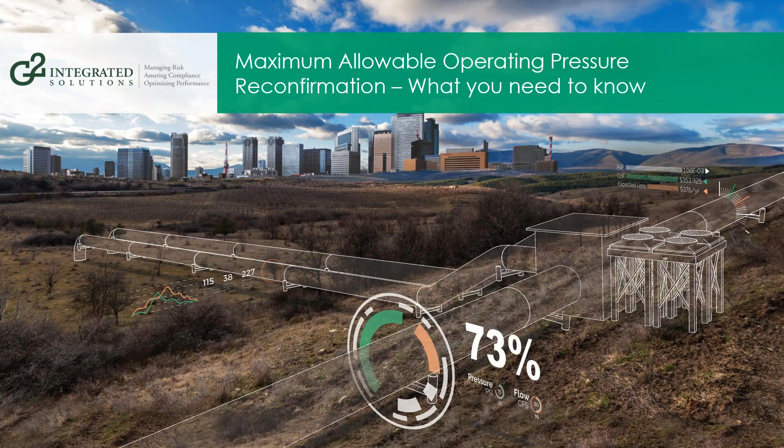The broadcast is now starting. All attendees are in listen-only mode.

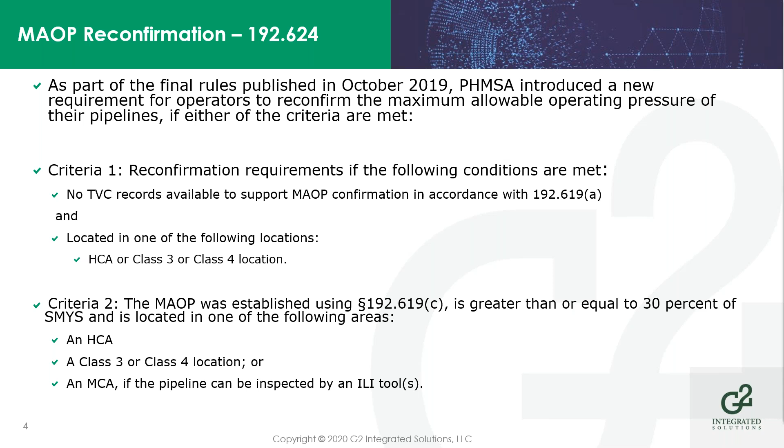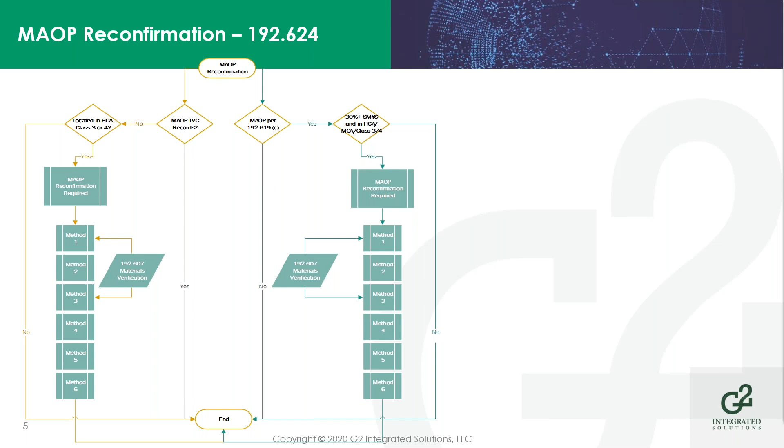All right, so the next important question to ask is, when do I have to have this done by? At a minimum, any operators who have mileage applicable to this requirement must have their procedures in place no later than July 1st, 2021.

However, if you do wish to start an MAOP reconfirmation project, you must develop and approve your procedures internally prior to the MAOP project starting, regardless of the drop-dead date. So if you're already looking to get some of this work done, we would highly recommend you get your procedures in place before you do anything else.

The other key dates here: operators who perform MAOP reconfirmation have to have 50% of their mileage done by July 3rd, 2028, and then 100% of their mileage done by July 2nd, 2035. So you have some time to get this done.

Given the ins and outs of the regulation and some of the things you'll have to do, there's some time to get it done. But the key part here is you have to get your procedures in place as soon as possible.

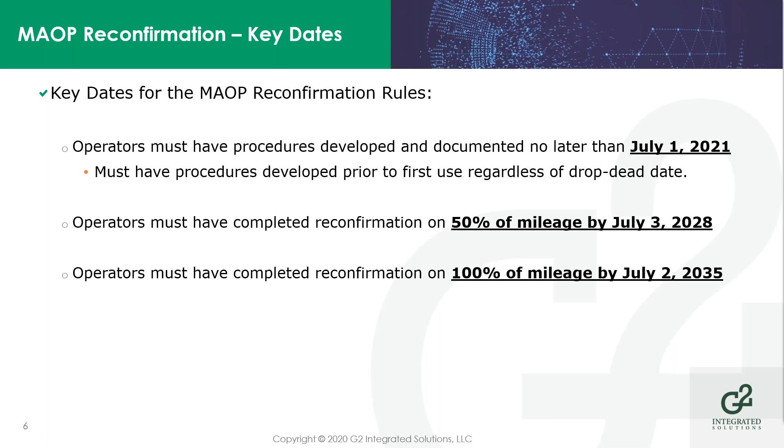And then for each of the deadlines, you can request an extension if necessary. Any request for an extension must go to PHMSA through their notification procedures. You have to include any up-to-date plans for completing all actions, the reason for the extension, the current status of your project, your proposed completion date, any outstanding remediation activities, and any temporary measures needed to mitigate impacts on safety. So anything you're doing to maximize the safety on the pipeline, you have to tell PHMSA what you're doing in order to have them consider any extension to this deadline.

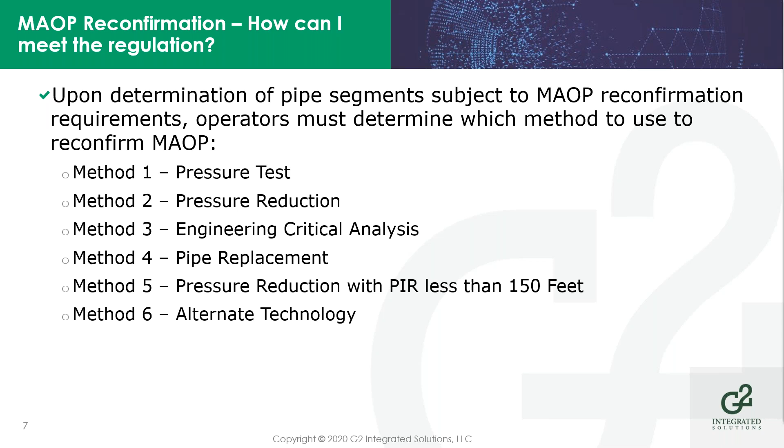All right, method 1. Method 1 is a good old-fashioned pressure test in accordance with Subpart J of Part 192. However, if you read Subpart J, you have to utilize the requirements in 192.619. You have to know what you have in the ground in order to develop a basis for your pressure test. You have to know what your pipe design is. You have to know certain material criteria and certain design aspects in order to come up with your calculated MAOP.

If you choose to use this methodology to reconfirm your MAOP, you have to have material records that are considered traceable, verifiable, and complete. If you don't have traceable, verifiable, and complete records, then 192.624 will point you to develop procedures in accordance with 192.607, which is your materials verification procedures. This basically ensures that operators of any grandfathered lines, or lines they purchase where they don't have records, can determine what they have in the ground to figure out what their MAOP calculations are. We'll talk about 192.607 a little bit later in the presentation.

But we'll focus on just the pressure test for right now. One of the other key points of method 1 when you're doing a pressure test is that if you have to validate your materials, this regulation requires you to test any materials cut out from test sites. If you're installing a header manifold or other equipment to perform a pressure test, you're required to test those materials both destructively and non-destructively in order to obtain any missing material records that you may have.

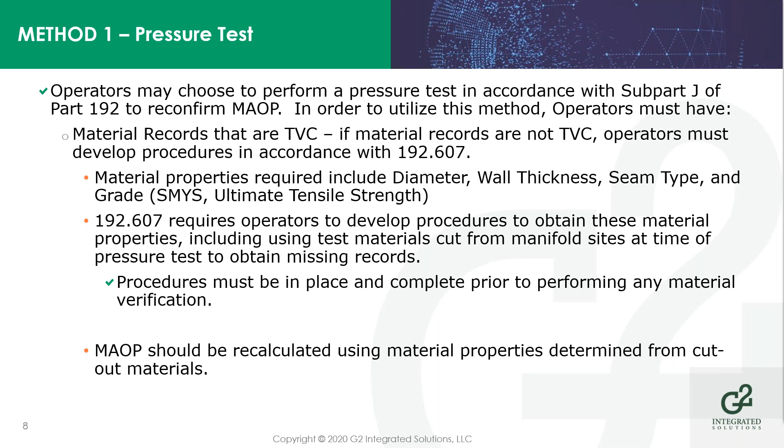Method 2 involves a pressure reduction. Operators can choose to take a pressure reduction in lieu of other options. This allows operators to avoid performing a pressure test by using this method. So basically you have to reduce your pressure and limit your MAOP to no greater than the highest actual operating pressure sustained by the pipeline during the 5 years preceding the enactment of this rule, which was October 1, 2019, divided by the greater of 1.25 or the class location factor. So if you have a higher class location factor, you have to use the higher safety factor.

The determination of your highest actual sustained pressure has to be the highest actual pressure for an 8-hour period. That 8-hour period does not need to be continuous. It can be made up of a variety of different time periods over the course of a 30-day period that account for a total of 8 hours at or above a certain pressure. So this method allows an operator to basically say, hey, we're good at operating at a lower pressure. We're going to drop our pressure down in accordance with this requirement, and then we don't need to do anything else.

If you changed your pipeline segment based on your class location and you don't have TVC records—TVC records being diameter, wall thickness, seam type—then you have to reduce the pipeline segment MAOP as well.

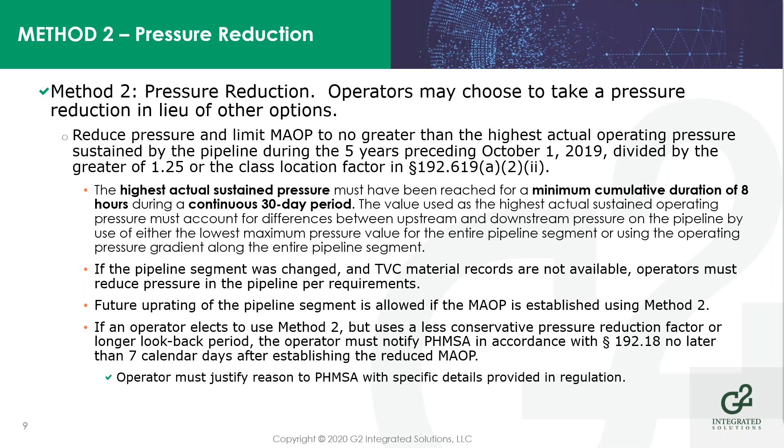Okay, method 3. Method 3 is an engineering critical assessment. An engineering critical assessment is basically a full technical assessment of the pipeline's MAOP. It's a procedure which determines the MAOP of the pipeline segment based on failure pressure, flaws, or defects. ECAs utilize material properties, operating history, ILI runs, other data to determine the predicted failure pressure of any particular flaw or defect in the pipeline.

Similar to method 1, an ECA does require a full materials verification. So if you don't have materials records that are TVC - traceable, verifiable, and complete - you're going to have to complete a materials verification in conjunction with this engineering critical assessment.

So the ECA does analyze and determine cracks or crack-like defects, metal loss defects, as well as analysis of interaction of defects to determine what the most limiting predicted failure pressure would be, which then allows you to develop your MAOP based on that lowest predicted failure pressure and the safety factor for either 1.25 or the class location factor.

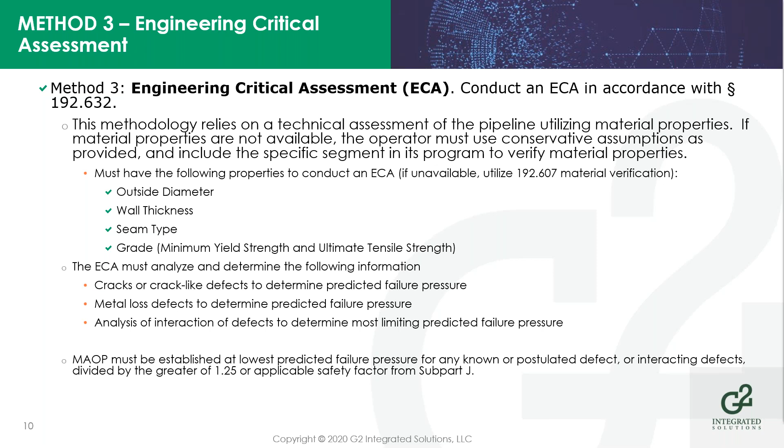Moving on, you're going to then determine the defects and the type and size. Once you've determined the type and size of the defects, you're going to perform your analysis suitable for that threat type. So if you've got metal loss, you're going to perform an analysis method suitable for metal loss.

Once you've performed your analysis method, you're going to calculate your failure pressure and your MAOP for whatever the lowest predicted failure pressure for any known or postulated defects that remain in the pipe. So if you've performed remediation on the pipe and you know you have defects that are still remaining based on whatever your IMP plan calls out, you then calculate what your failure pressure is based on what's remaining in the pipe. If you have cracks or crack-like defects, you need to calculate remaining life as well, which will then lead you into reconfirming what your MAOP is.

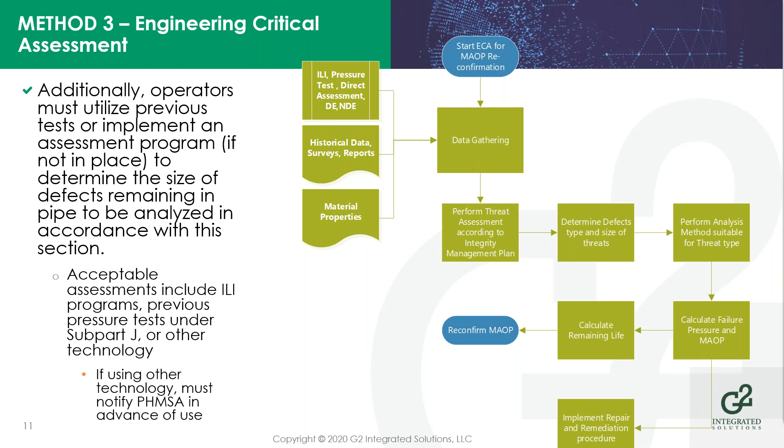Again, if you decide you want to use other technology for an assessment method other than what's provided, you have to notify PHMSA in accordance with 192.18.

So method 4. Method 4 is the simplest, albeit probably one of the more expensive options. In essence, it allows an operator to simply replace the pipeline segment and perform requisite pressure testing and material verification associated with any new construction project.

If you're already planning to replace pipe, this is probably a pretty good option to reconfirm a segment, because you're going to gather all the data as part of that pipe replacement. You're going to create new material records, you're going to perform a pressure test, so you're basically going to create all the missing records, albeit for a new section of pipe.

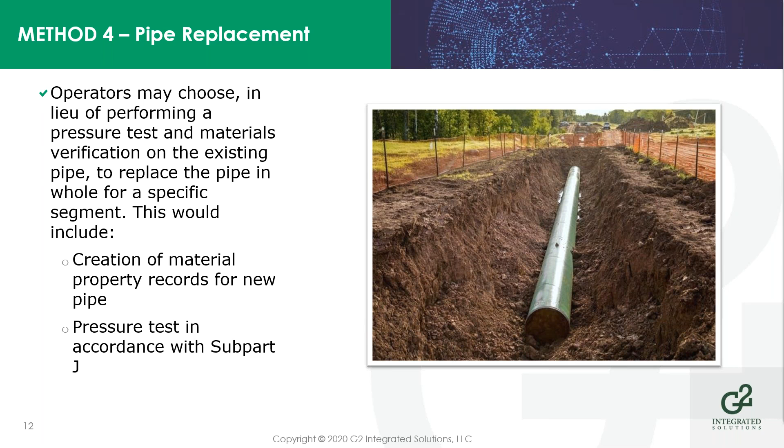All right, method 5. Method 5 is similar to method 2, and it involves a pressure reduction. However, this is for pipeline segments that are operating at a lower pressure, so basically a potential impact radius of less than or equal to 150 feet. The difference between method 2 and method 5: method 2 utilizes a safety factor at a minimum of 1.25 or the class location factor, while this method utilizes a factor of 1.1.

Which is reflective of the lower pressures involved as part of these particular pipeline segments. Other requirements are very similar or the same, including the determination of how you come up with your highest sustained pressure, 8 hours over a 30-day period, and the ability to uprate the pipeline segment in the future.

One difference here with method 5 is there is a requirement to increase patrolling. Class 1 and 2 locations will increase from 2 times per calendar year to 4 times per calendar year. Class 3 and 4 locations will go from 4 times per calendar year to 6 times per calendar year. Any regular methods of patrolling are considered appropriate. So again, it's similar to method 2, but it's changed for those lower pressure, lower stress lines.

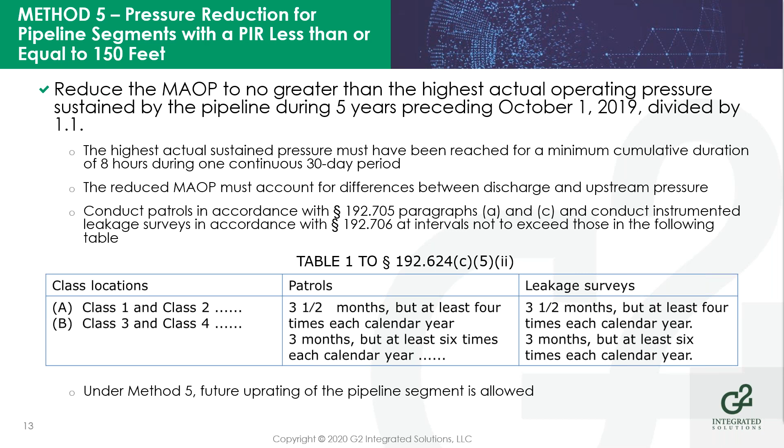And then finally, method 6. Method 6 is PHMSA's all-encompassing alternative technology. If you have another methodology that you can use to safely determine the MAOP, you can petition PHMSA to use this method. If you do petition PHMSA, you must clearly explain what you're planning on doing, what technology you plan to use for tests, examinations, and assessments, how you plan to establish material properties, any analytical techniques you may use with analysis from utilizing prior data to ensure consistency in the results.

As well as any other processes you use to ensure consistency with any corresponding test pressures, hydrostatic tests that you've performed on the line. Procedures and processes, again, you have to explain what procedures and processes you're using to actually conduct this work, conduct examinations, any assessments, how you're analyzing defects, flaws, and how you plan to remediate anything. You must also include any pipeline segment data, including design, maintenance, operating history, and characterization of flaws or anomalies. If you do use method 6, in accordance with PHMSA requirements, you must notify them no less than 90 days in advance of using this technology.

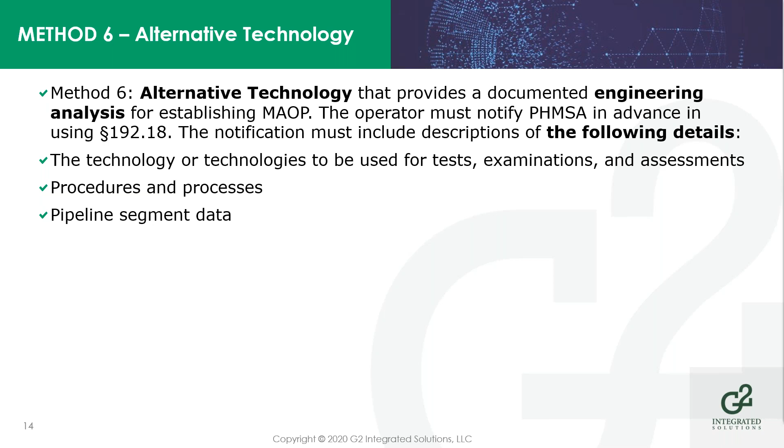And finally, records. Any records developed during an MAOP reconfirmation project should be retained for the life of the pipeline. Essentially, this makes sense. A lot of these lines that are going to be affected by this regulation don't have these records. So we're going to develop these records, maintain these records in the event that the pipeline gets sold or transferred to a different operator. That way that information is available.

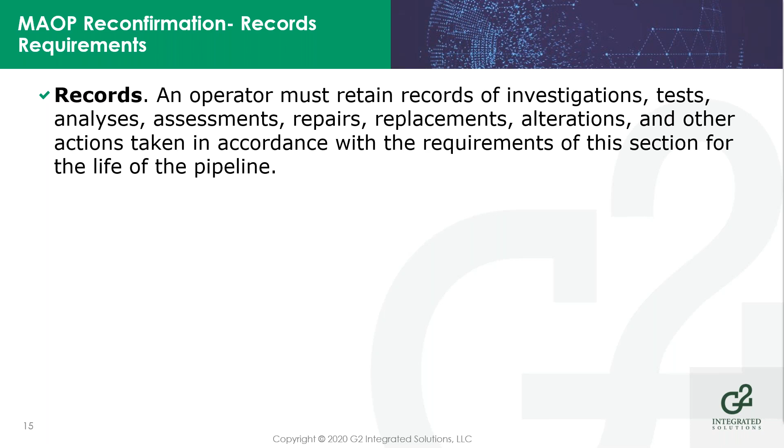All right, so we've talked a lot about MAOP verification. Now we're going to talk a little bit about the materials verification requirements in 192.607. As I talked about previously, 192.607 is a requirement for operators to develop the procedures to verify materials for pipeline segments where they don't have traceable, verifiable, and complete material records. Again, this is notable as a requirement of both Method 1 and Method 3 for MAOP verification.

Once you realize that you have to go ahead and perform this type of work, you have to develop procedures to gather this data from your pipeline segments. Now, this applies to both above and below ground pipeline segments, so it's got to be applicable to both digging and not digging. Material records specified by the rule includes diameter, wall thickness, seam type, pipe grade. For valves and flanges, you have to have a pressure rating.

Additionally, this section requires any toughness values that you gather as part of this material verification process in order to either conduct an ECA or determine your predicted failure pressure. You have to retain those records for the life of the pipeline. So key points here, you have to develop the procedures and show how you're going to gather this data. They should cover both destructive and non-destructive testing, direct examinations, assessments for when your pipe is exposed, particularly if it's all below grade.

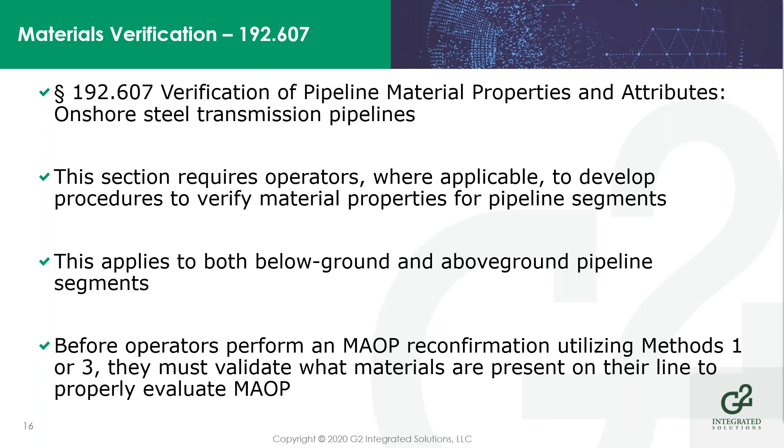So 192.607, PHMSA realized that the intent to go and just dig up pipe to verify materials was going to be fairly expensive and time-consuming for operators. So testing is not expected to be performed, or digging is not supposed to be performed, solely for the purpose of material verification. But material verification should be worked into an operator's dig program to provide for testing during opportunistic times. So things like if you're doing a direct examination on an anomaly, if you're performing a repair, a remediation, you're doing maintenance, or you have an excavation associated with a replacement or relocation.

Operators should ensure that if they're looking for material verification, they work the verification project into any existing dig program opportunities.

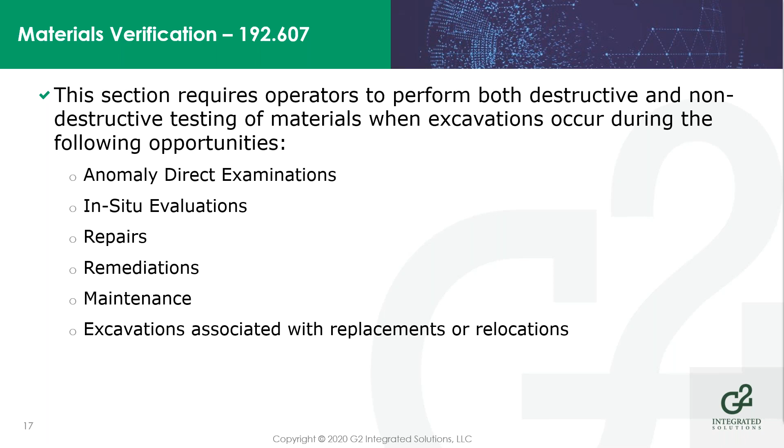You should also note that as part of opportunistic excavations, materials verification may result in the hole being open longer than expected. This is a logistical issue. You want to make sure you have crews ready to perform whatever testing you need once a line is exposed, so it's not exposed for an extended period, and that everybody's working together to ensure the data gathered during these excavations is gathered correctly, so you have good quality data and can ensure you have TVC records after the work is complete.

Some other requirements in 192.607 are specific to non-destructive testing methods. If you build out a procedure, you must use methods, tools, procedures, and techniques that have been validated by a subject matter expert. PHMSA expects that a subject matter expert is someone with formal or on-the-job technical training in the technical or operational area being analyzed, evaluated, or assessed. So someone with formal knowledge, training, and experience in that area should be validating these procedures

that are going to be used. You must also conservatively account for measurement inaccuracy and uncertainty. You should manage that in the process if you know you have tools that either have a margin of error, or some other means of introducing inaccuracy, or if you don't know if it's 100% accurate, you have to adjust for that, sliding more on the conservative side.

And finally, this kind of goes without saying, but it bears repeating: always make sure you're using test equipment that's been properly calibrated. Keep your equipment calibration and calibration certificates, because that's going to be checked during an audit.

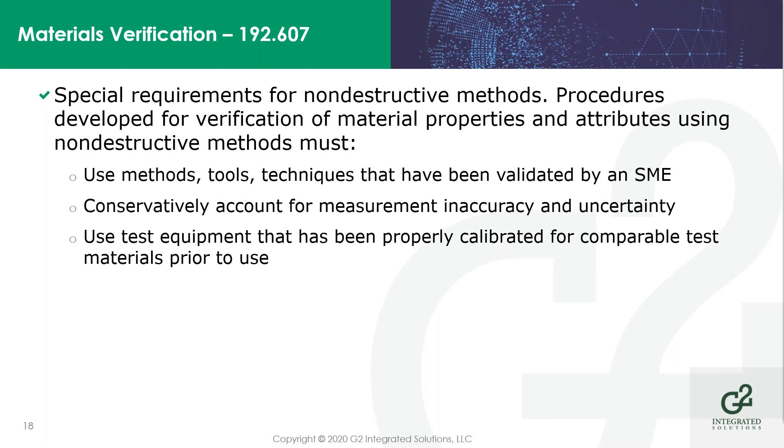All right, so sampling. Any operators who may have large segments of pipe without material data, PHMSA has included an option to develop a sampling program. Operators can group like segments of pipe together based on certain attributes, including wall thickness, grade, manufacturing process, pipe manufacturing dates, and construction dates. When determining sample populations, you really need to be careful about the dates you're using to bound these populations together.

Dates between construction and manufacturing should never exceed 2 years. It's not a sliding scale, it's a hard stop after 2 years. Just as an example, if you have pipe manufactured at the same time, store it on the rack, and install it together, say 3 years down the road, you can include that pipe in the same population segment. However, if you manufacture pipe at the same time, install half of it, and then install the second half 2.5 years later, those are two separate populations of pipe, because they've had different environments that they've been in.

Also, one of our recommendations, though not explicitly called out in the regulation, is that you keep your sample populations to the same diameter as well as the same pipeline system. This allows for easier record keeping and delineation of specific pipeline segments, and it'll assist with the determination of MAOP.

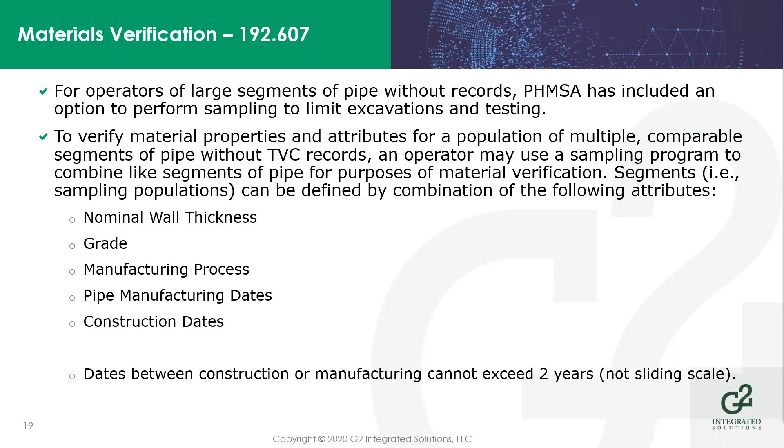For operators with larger pipeline segments, once you define those segments, you have to figure out how many excavations need to happen. Basically, if you have a large population, PHMSA requires 1 per mile rounded to the nearest whole number, or up to 150 excavations if you have over 150 miles of line. For each defined sample population, you need the number of excavations with accompanying material verification to establish statistical assurance for that sample population. If you haven't exceeded that number of excavations, any other excavations on that pipeline segment are useful for sample population protocols, so you can use other excavations to help support that sampling.

You should ensure that, again, it's 150 excavations over 150 miles. Usually what we've recommended to operators performing this type of work is that you should strive to have at least 3/4 of a mile between excavations. This allows for a greater distance to determine if you have consistency with the sampling project, and that's a key thing: establishing consistent results. If you don't have consistent results, you have to expand your sampling program. The key here is that you have to achieve some sort of confidence level.

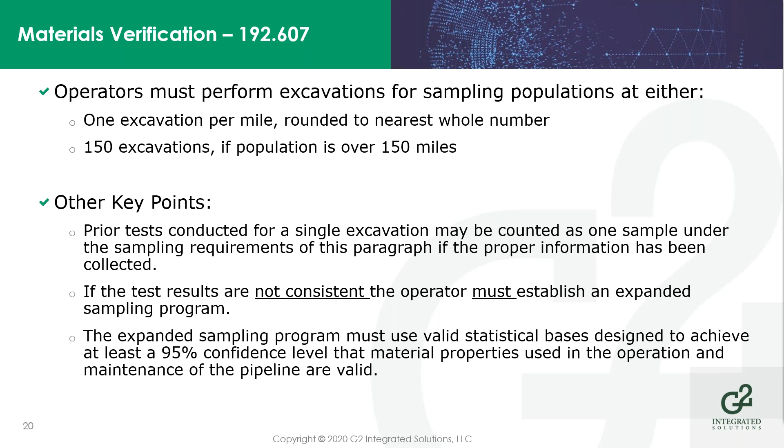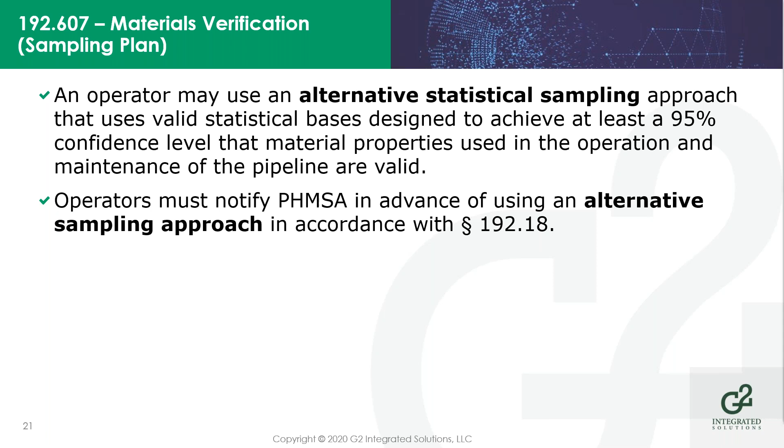And again, PHMSA always provides the alternative approach. If you have a better way of doing things, a better methodology, you can request approval from PHMSA to use that approach. You must, again, achieve at least a 95% confidence level using that standard statistical methodology. Same notification requirements apply for this as well. You have to notify PHMSA at least 90 days prior to implementation of this type of work.

All right, so finally, components. Operators still have to develop similar material verification procedures to establish and document ANSI ratings, with the exception of the places listed here in Part 1 - compressor stations, meter stations, reg stations, river headers, mainline valve assemblies. You have to verify material properties for non-line pipe components if it's greater than 2 inches in OD, if it's greater than X42, 42,000 PSI, and anything that you cannot isolate, you have to go ahead and verify the material properties for those non-line pipe components.

And the same thing applies - you have to make sure you have procedures in place prior to performing any material verification on non-line pipe components.

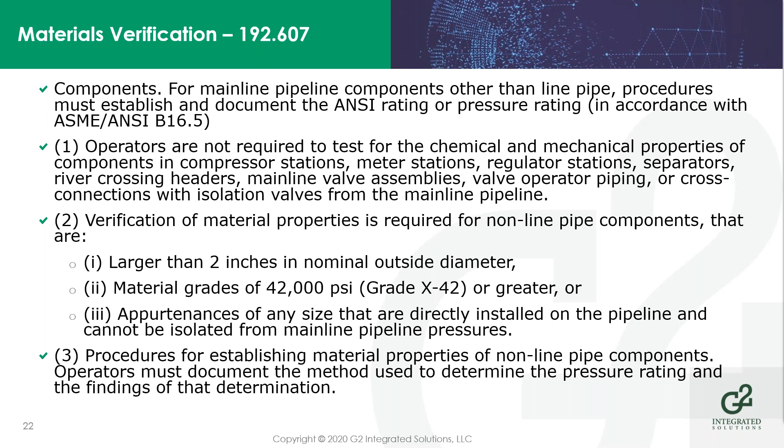So just to review real quick, I know we talked about a lot of different things. Again, the first key thing is you have to determine if you have segments that are applicable to the MAOP verification requirements - TVC records, class 3 or 4, HCA. If you establish an MAOP based on operations, 30% SMYS, HCA, class 3 or 4, or an MCA.

So there's those two groups. If you have segments that those are applicable to, you got to do it. Always make sure you develop your procedures first. Make sure your procedures are broad enough that it allows you to use different methodologies for different segments.

You may want to do a pressure test on one segment. You may have another segment where you don't want to do a pressure test and you want to do a different methodology. So make sure you're developing your procedures that are flexible enough to allow you to change methodologies. You don't always have to use the same methodology for every segment.

And then if you have to, make sure you validate your materials at those opportunistic digs. Work that into your dig program. Don't go out and dig just to verify materials, but use those opportunities where you've got the pipe exposed to gather that data that you need.

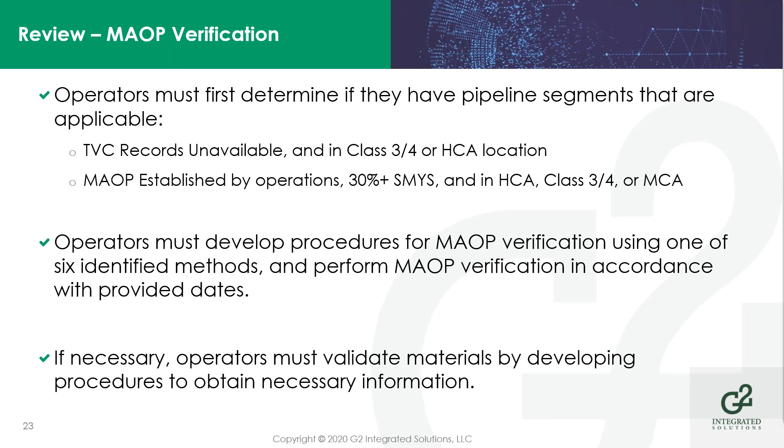So that's it for me. If there are any questions, I'd be happy to answer them as best I can. Sure, we do have a couple here.

Ready? What is the definition of inconsistent material properties? Inconsistent with what information? So we're hoping that PHMSA is going to clarify this with the FAQs. Basically, inconsistent means that you're getting different material properties when you're performing your digs. You're getting maybe different ODs, different wall thicknesses. You've got different grade or seam types. Inconsistent being, and again, PHMSA is kind of loose with this language, but you're not seeing the same thing over and over again across the segment.

And I know people have pipeline segments that have multiple pieces of pipe in it, and PHMSA's tried to adjust for this, but inconsistent is if you've got some records that indicate what's in the ground and you don't have anything to validate that. If you're doing your digs and you're getting information from those digs where it's not jiving with what you already have or what you've seen maybe a quarter mile down the road or a half mile down the road or wherever your next dig is, you may have to perform an expanded sampling. I hope that was helpful.